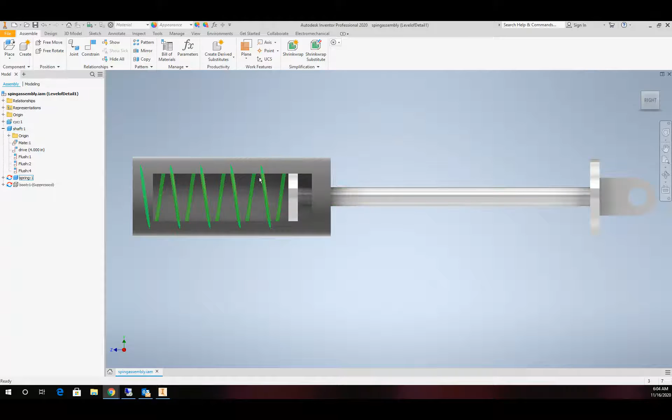Today's video, we're going to finish up our spring boot assembly. In the previous video, we created this adaptive spring that changes as the piston is drawn in and extended out. We'll demonstrate that before we get started, so we'll just drive that one constraint. And there we can see our spring is engaged and working.

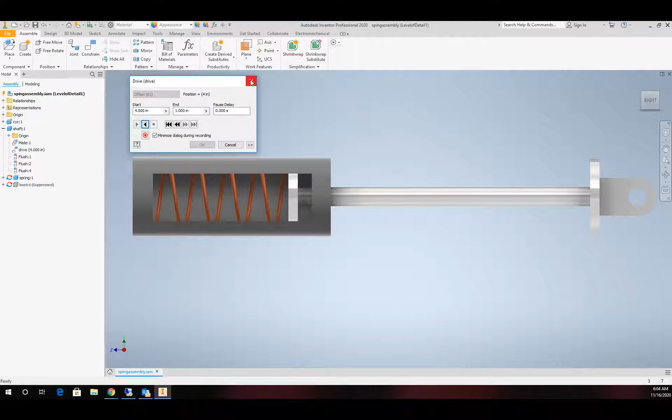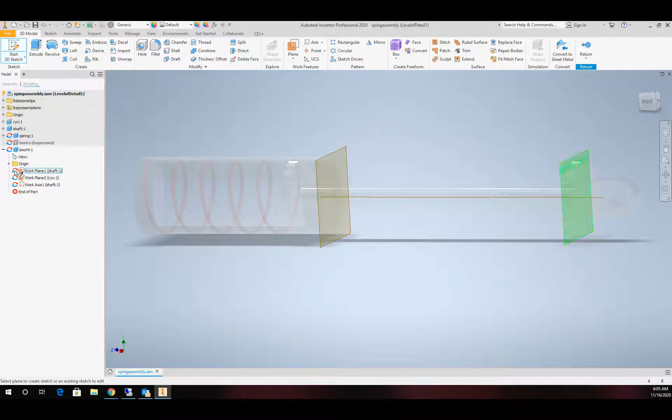All right, so today we're going to go ahead and make the boot. So I am going to create a new part file, and I want to make sure it's in the right folder. Okay, once I'm in the new part file, I am going to go ahead and offset the plane at the end of the piston with a 0 distance, offset the plane at the end of the cylinder, again with a 0, and I'm going to bring in the axis down the center. So those are my three work features. We'll go ahead and start a sketch, and we'll place this sketch on the XY plane.

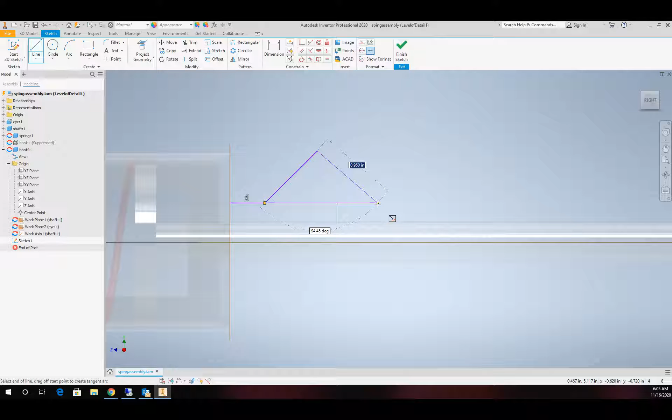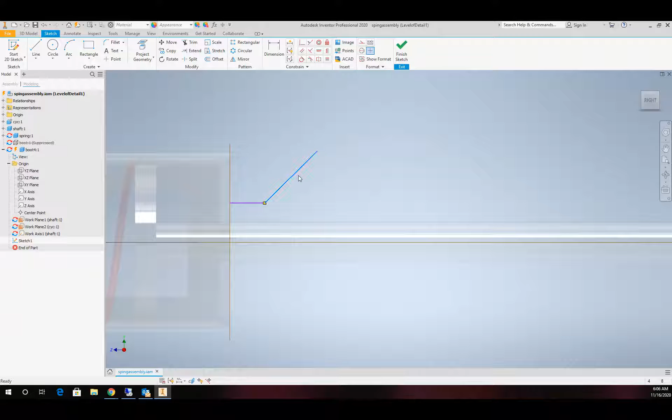Okay, now it's time to do our sketch. I'm going to start with creating a line down here, and then we'll start to create some angles that will represent the boot geometry. I want to try and avoid any automatic adaptation or constraints. And I feel like I already have some. I see some 90 degrees in here. That'll mess this up. Okay, so let's try it again.

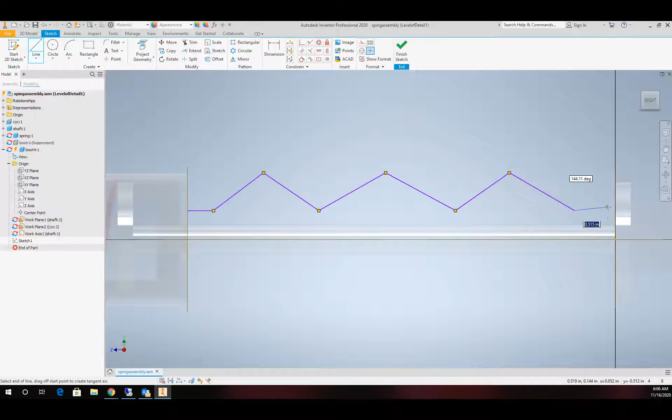All right, if I can get 3 good ones in here. Okay, that looks pretty good.

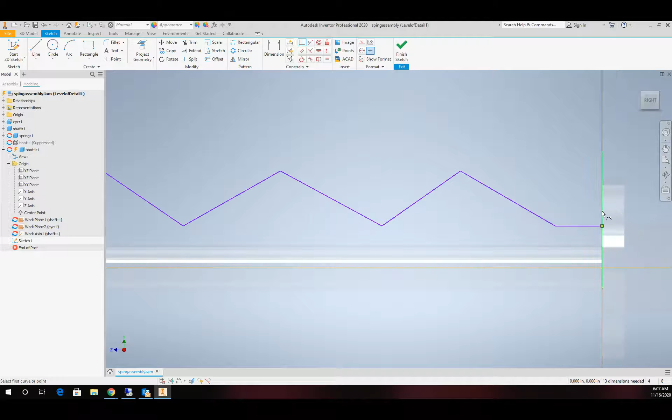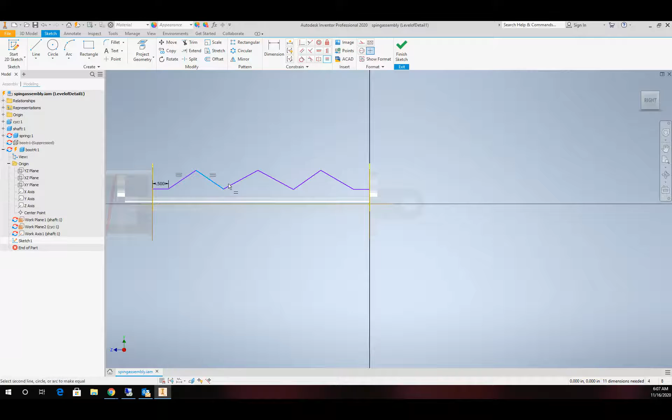All right, at this point, I'm going to take an equals constraint and place it on this piece and this piece. I'm going to throw a constraint onto the ends of each of those work features. That's what's going to make the connection between this and controlling our dimension. I can't remember if I put an equals on here and here. I did. All right, let's put a dimension there now, and we'll make that 1/2 inch. Okay, from there, I'm going to put equals on each of these.

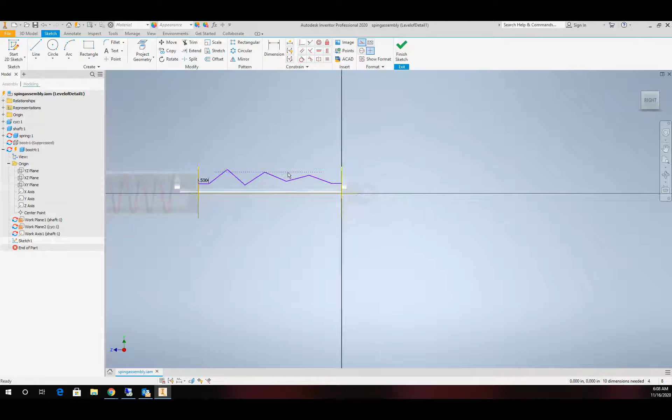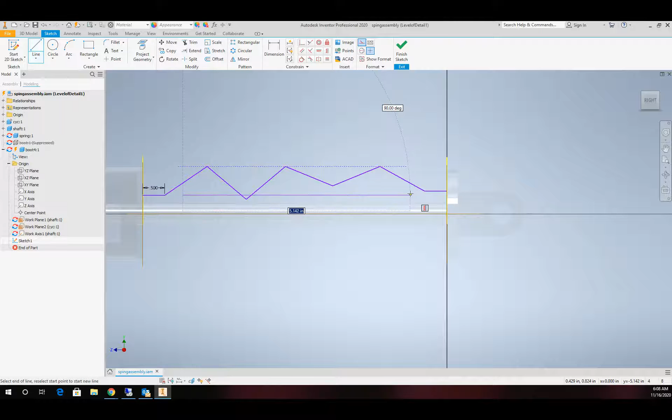Then I'm going to take and create a sketch line as a construction, and we'll just stretch it across. I'm not going to place a dimension on this, but I'm going to try and control where these points are. All right, let's do the same on the bottom.

Okay, let's establish a dimension off of this piece to the center, and we'll set that at 0.5 as well. All right, that's looking pretty good. No dimensions on our construction lines so that they're allowed to change.

We're now going to put an angle dimension across here to here. It's showing 121 degrees and some change right now. We're going to change that by right-clicking on it to a driven dimension. Notice the brackets. That way it can change and adapt to our geometry changes. We'll set the second dimension of the angle to the first one, and we'll repeat that process down.

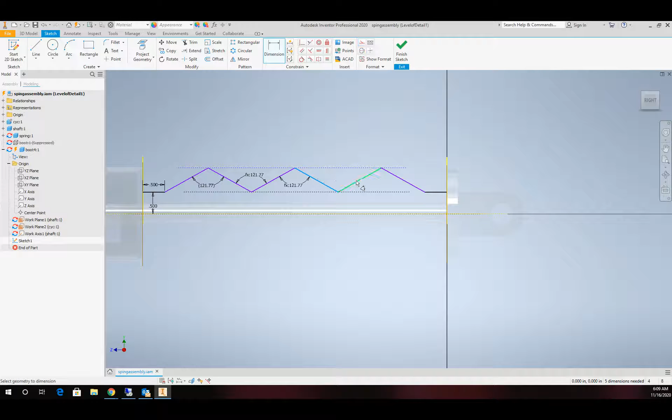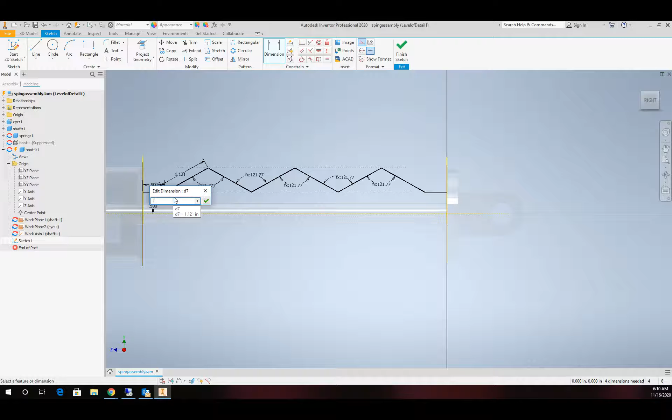All right, good. My final dimension is going to be a line dimension on one of these straight edges, and we'll set that to, let's try 1. Let's add a little bit more to it. 1.1. Okay. And that should finish that line. Everything should be in good shape.

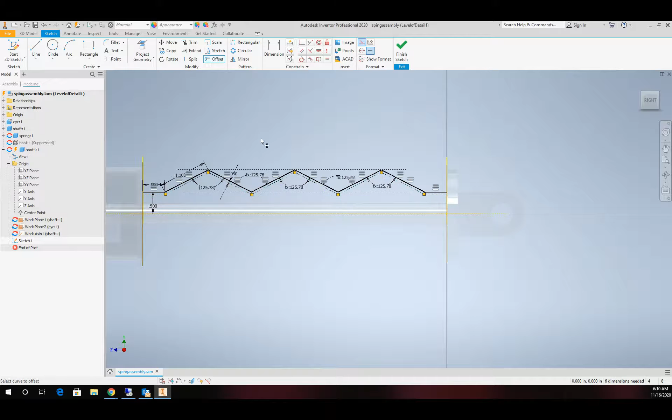We're going to go ahead and offset this down at 0.05. Oops, let's undo that. I left that construction piece on. Do it again.

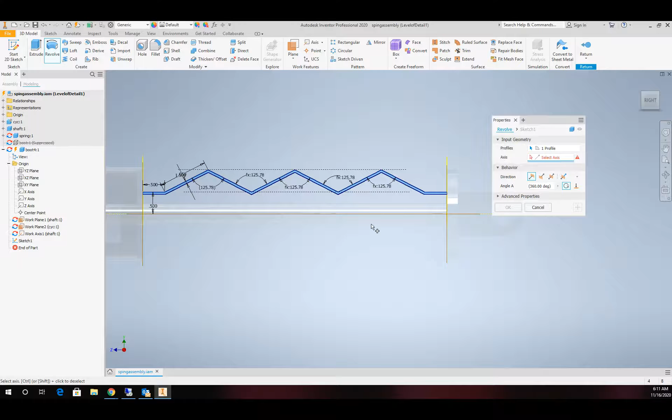All right, that's good. Finish the sketch. We'll now take and revolve the geometry along the axis. Good. Okay.

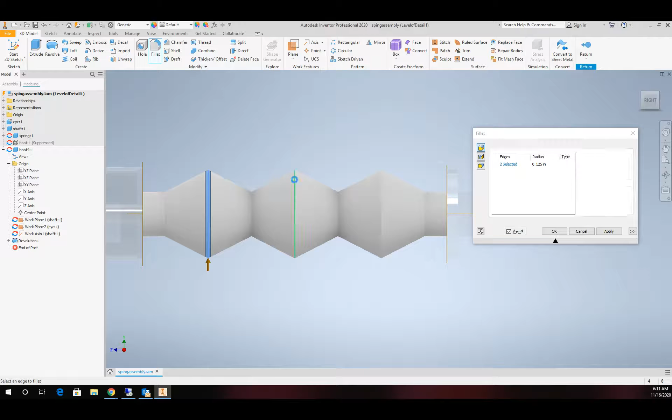At this point, we'll come in with a fillet command. Okay, so I filleted all our radiuses. And I'm going to change my view to wireframe so I can get the insides while we're here. So we'll come back and fillet those.

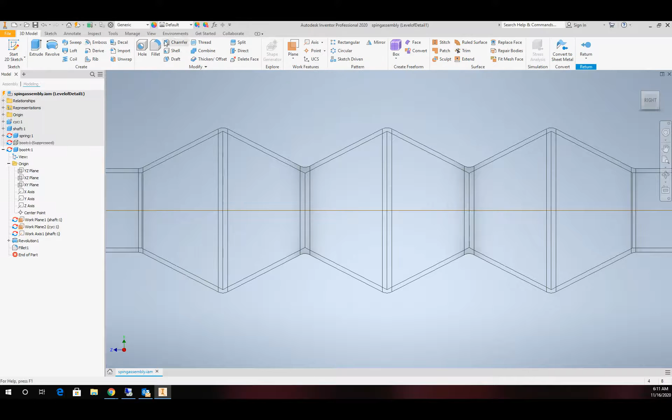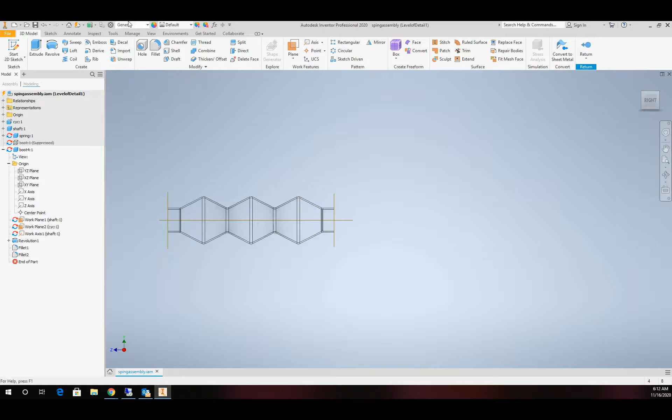All right. Looking good. Change our view back to shaded, and we'll go ahead and add a material. We'll do rubber.

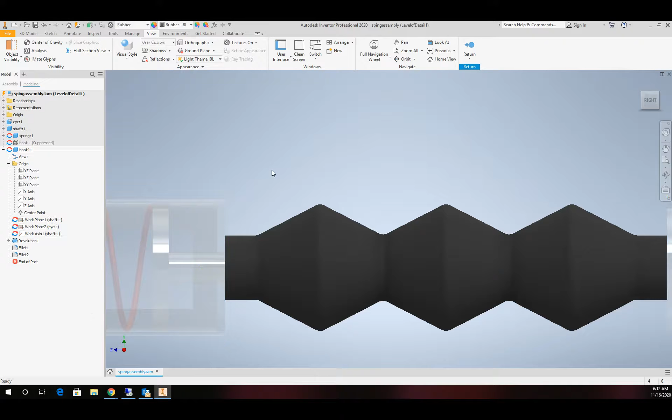All right, before I move on, I'll go ahead and turn the visibility of my two work planes and work axis, or my work features, off. And we'll return back to our assembly model.

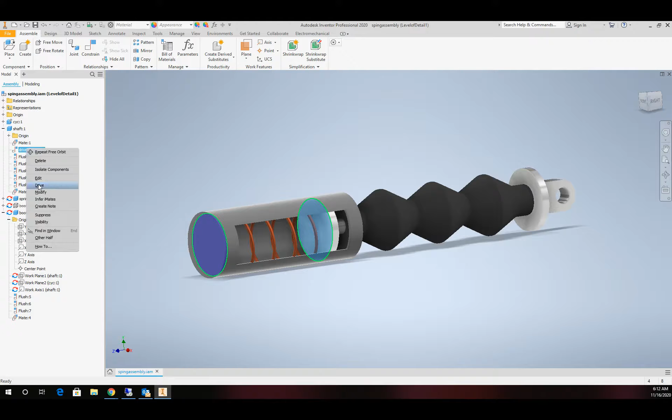Go ahead and change the view a little bit, and we'll come on up to our controlling constraint, right-click on it and drive it. And this should work nicely for us.

There we go. We got ourselves a rubber boot that is adaptive, that is running at the same time as our adaptive spring. So this was a fairly simple assembly that demonstrates two adaptive features in the same assembly model being controlled by a single constraint. Remember that original single constraint was a mate between this face here and the inside of the cylinder with a distance that we're running between 1 inch and 4 inches.